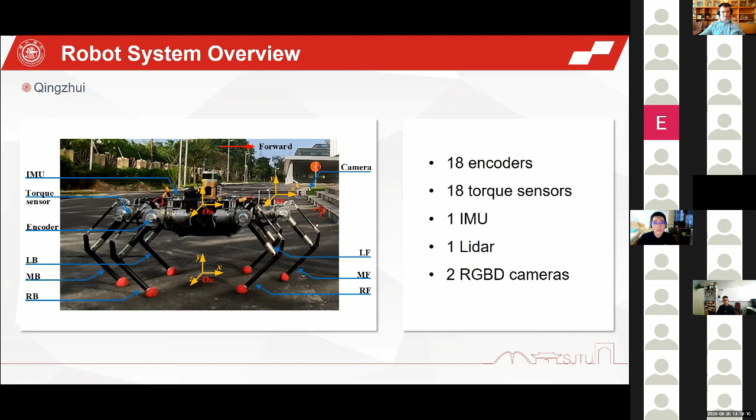Let's see the leg structure. Each leg has 3 motors, so the degree of freedom is 3. With the data from the encoders and the torque sensors, we can calculate the position, velocity, and force of each tip.

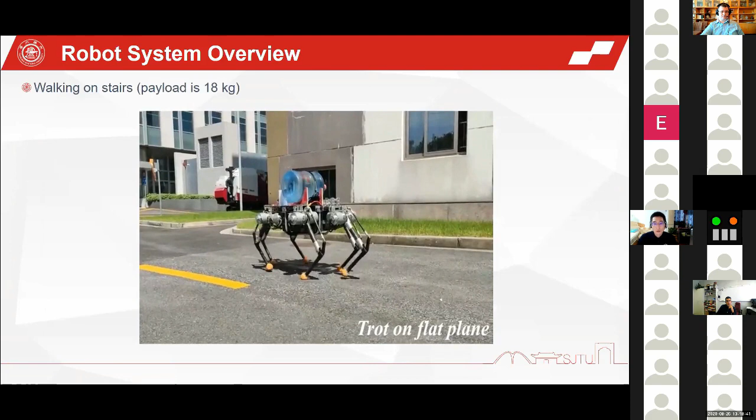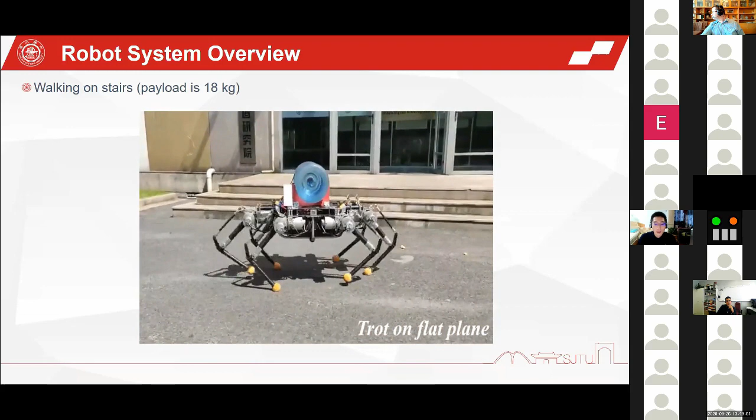In our early work, we proposed an online force-based gait planning. In this video, the robot first trots on the flat plane, and then walks on the stairs. The payload is 18 kilograms, and the robot weighs about 50 kilograms.

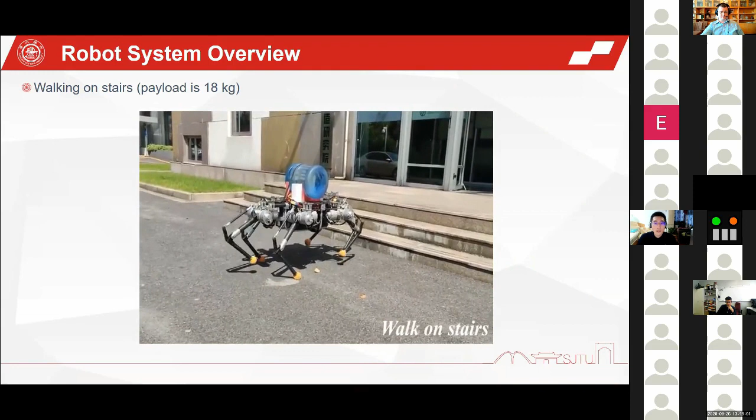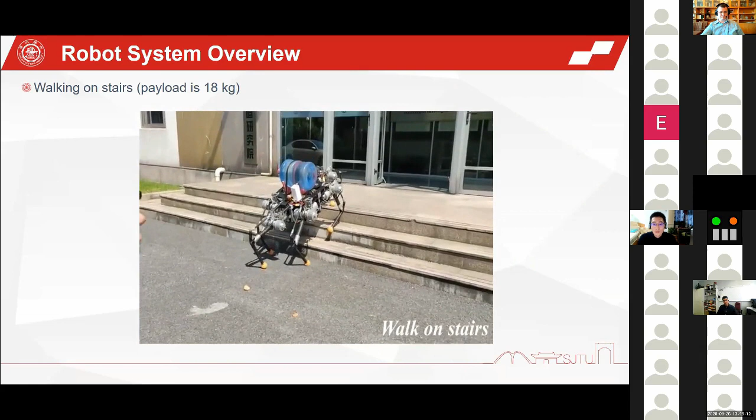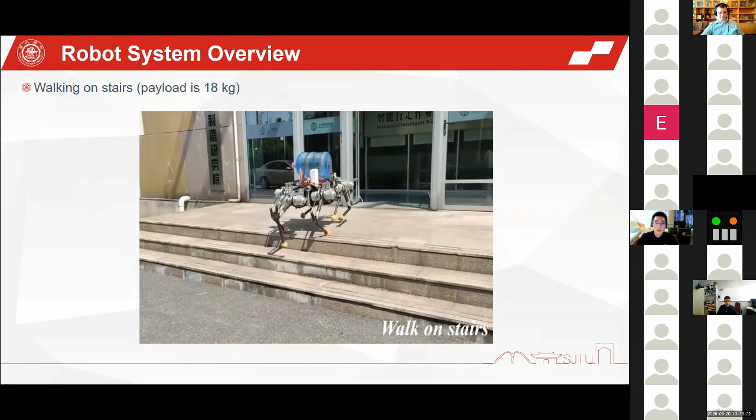So now the robot walks on the stairs. In this gait planning, there is no vision information, so there are some problems. So what are the problems?

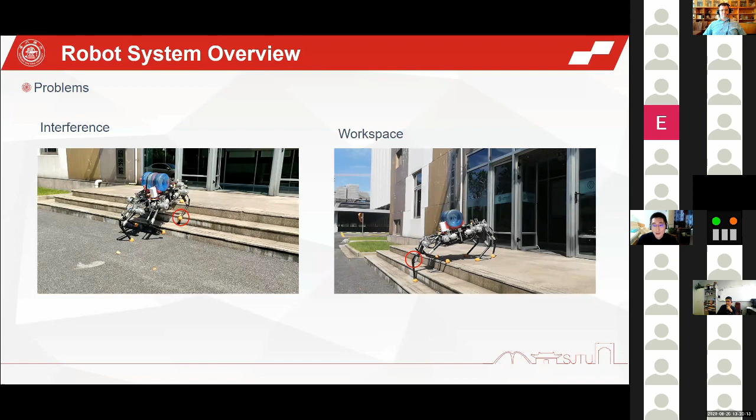To solve these problems, we proposed an online perception-based stairs climbing planning method. There are 3 things we need to do. The first is we need to know the robot's position and pose.

So we need state estimation. The second thing is that the robot needs to know where the stairs are and what shape they are, so we use the RGBD camera to model the stairs. After that, the third thing is we need to calculate the right gait parameters.

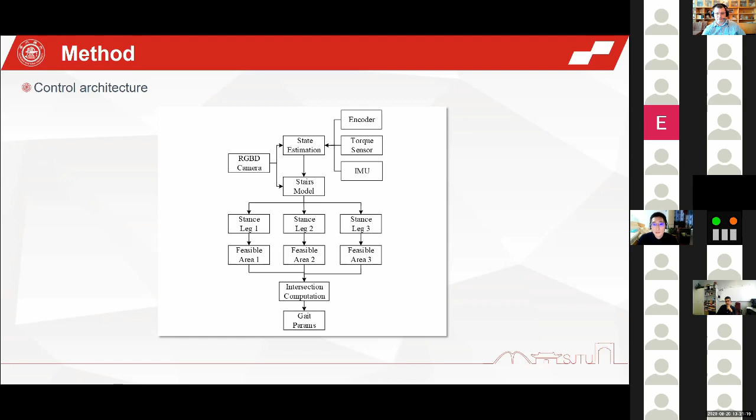Each stance leg has a feasible area, so we need to use intersection computation to get the appropriate gait parameters like step length or step height.

Although we can use IMU to calculate the robot state, we use forward kinematics as another source. In our gait planning, there are always three tips in contact with the ground, so we can calculate these three stance tip positions in both the body coordinate system and the ground coordinate system. Based on that, we can get the pose and position of the robot.

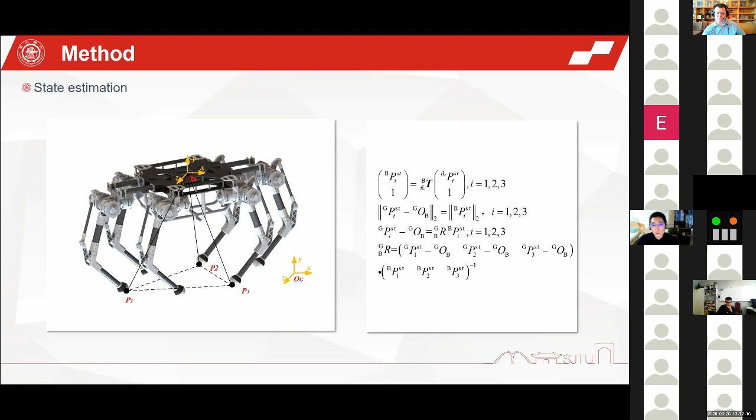So after we know the robot state, we need to model the stairs. We get the depth image in front of the robot with an Intel RealSense camera, and then we transfer it into the point cloud. We use the ICP method to combine each frame and model the stairs. After that, we segment the horizontal plane to model the stairs.

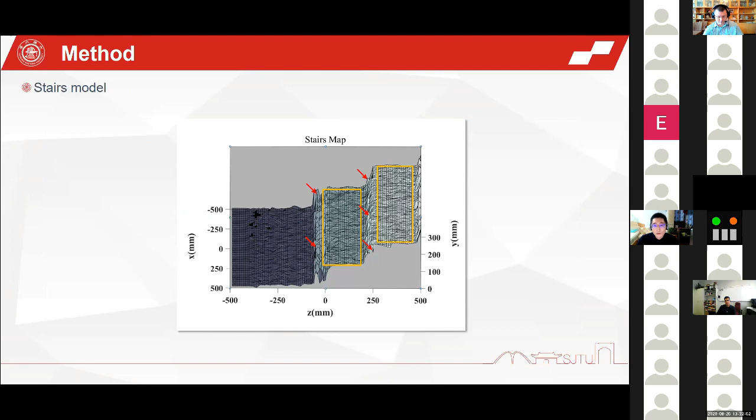After we know the relationship between the robot and the stairs, we need to get the right step length. To avoid collision, we model the shin as one cylinder, and we model the terrain as a cylinder too, so we can calculate the distance between the shin cylinder and each terrain cylinder. Based on that, we can decide if this foothold position is safe or not.

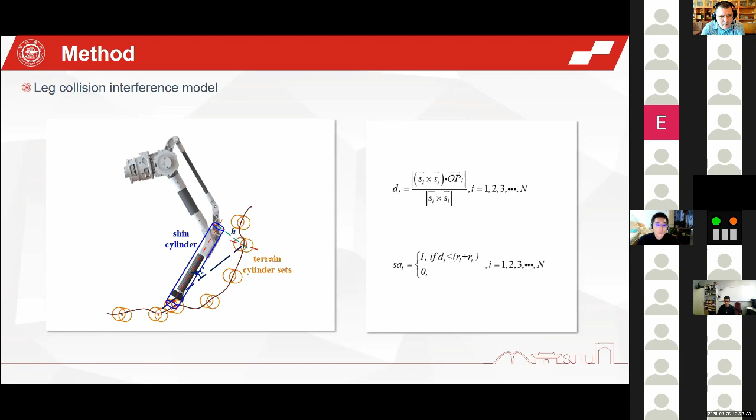Our work is to avoid situations in figure C and figure J.

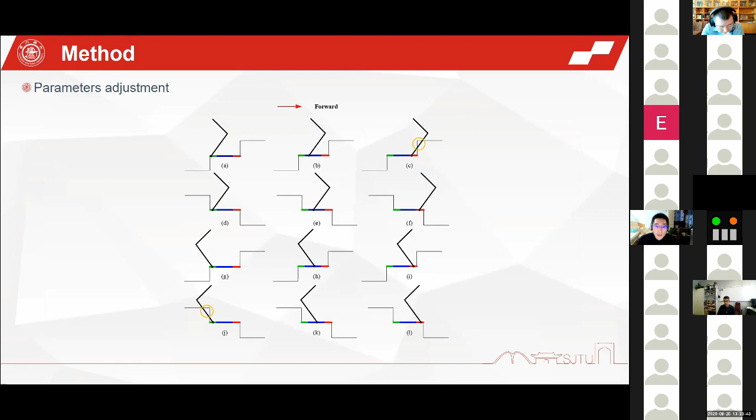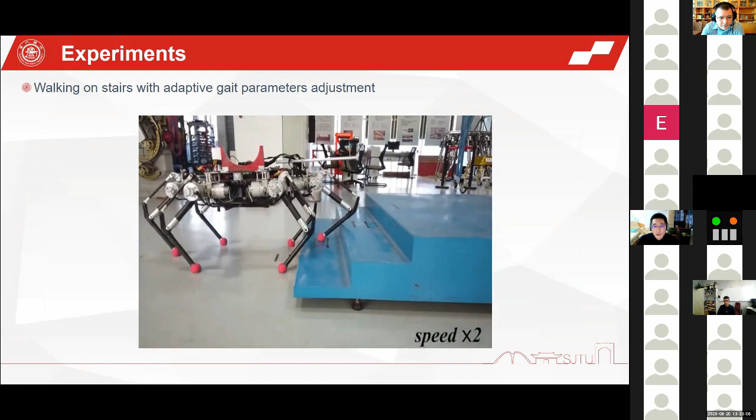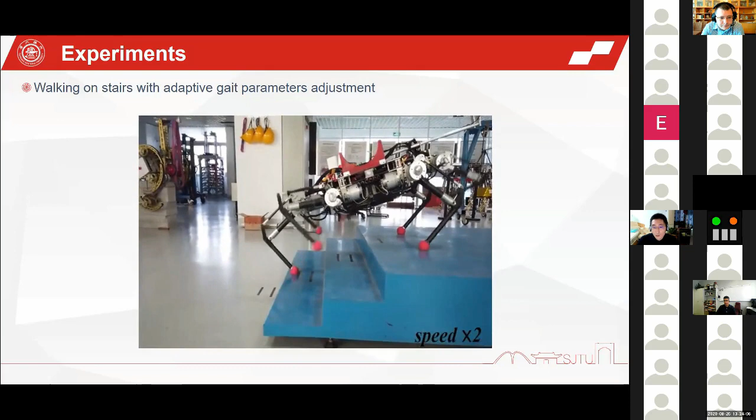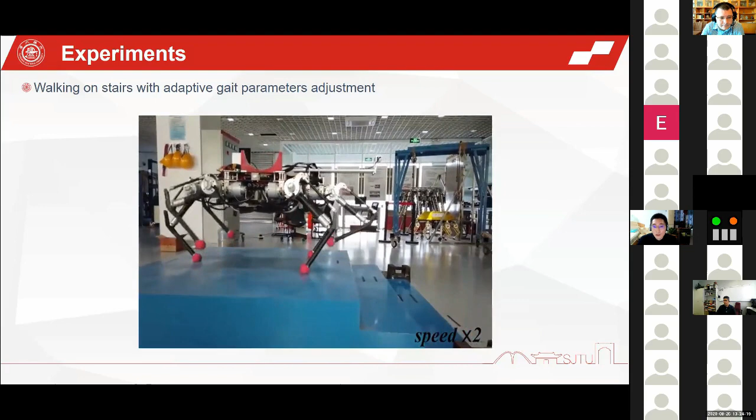Now let's see our experiment. We use an Intel RealSense camera to model the stairs. The robot climbs the stairs step by step. The distribution of legs is much better because the leg can step on only one stair in this experiment. Sometimes you can see the robot may walk back because it adjusts the workspace for the next step.

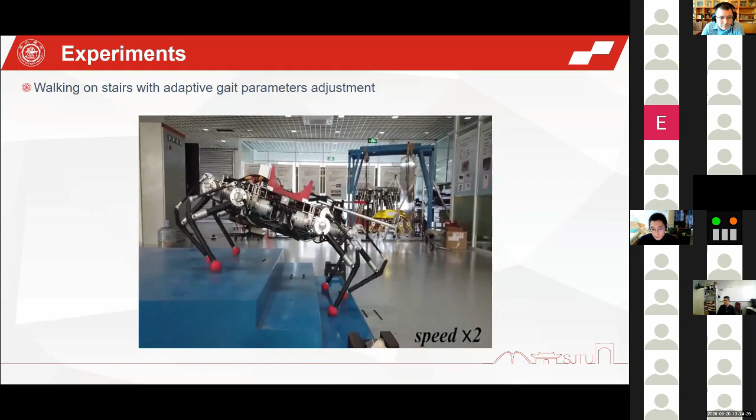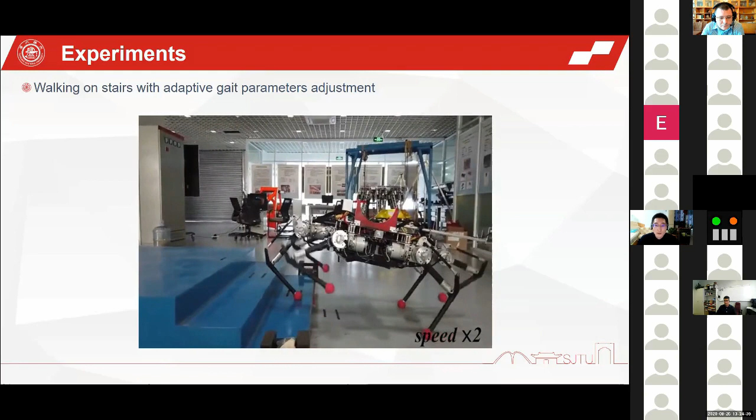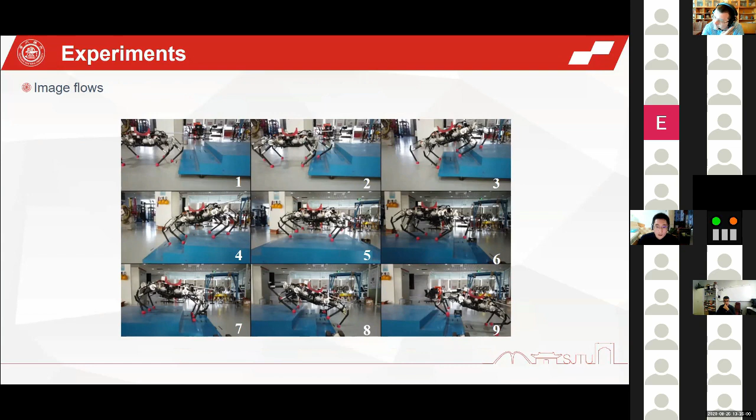Now the robot walks down the stairs, and from this image flow we can see we solved the two problems we proposed: there is no collision, and the robot is much smoother. This is the experimental data. The black line is the trajectory of the body center, and the colorful lines are the tip trajectories.

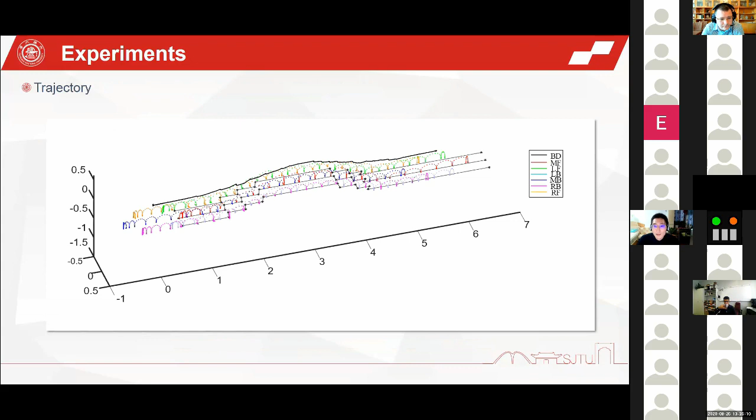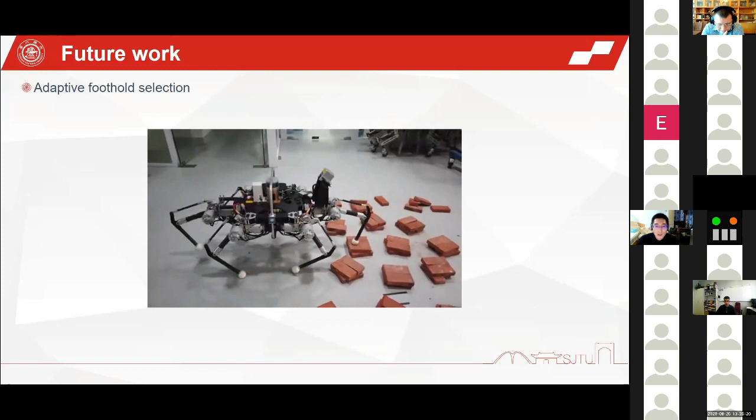In the future, we not only want to change the gait parameters, we want adaptive foothold selection, because in some complex terrain the safe area is discrete, so the robot needs to select the foothold area adaptively. Okay, that's all. Thank you for your listening.

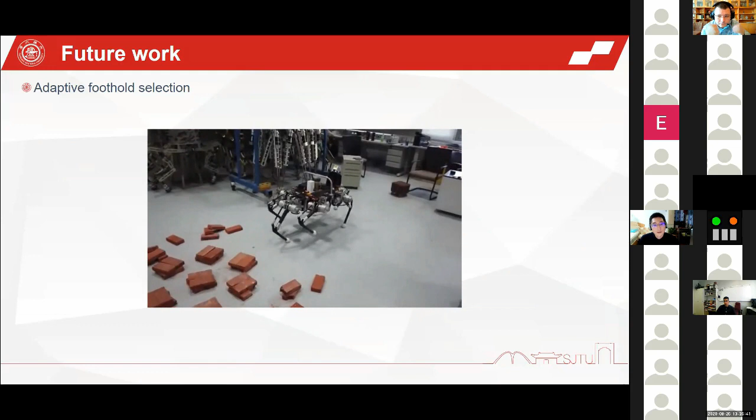So thank you, Zhao, for the presentation. Anyone have questions? I think Jiang, you can continue. Yeah, can you hear me? Yes, we can hear you. Okay, so thank you for the very nice presentation.

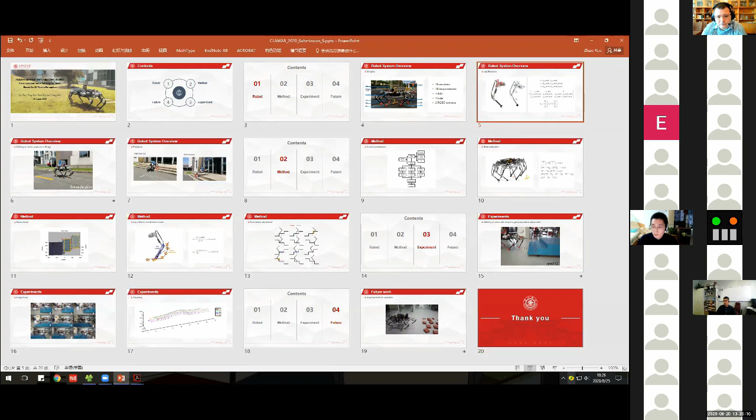So I have one question because I see the structure of your hexapod. It's a little bit different from the classical hexapod because I found the structure has a quadruped plus two legs in the front part and the rear part of the robot. Have you ever compared this new structure to the classical hexapod layout, like each side having three legs? What is the benefit of this new structure?